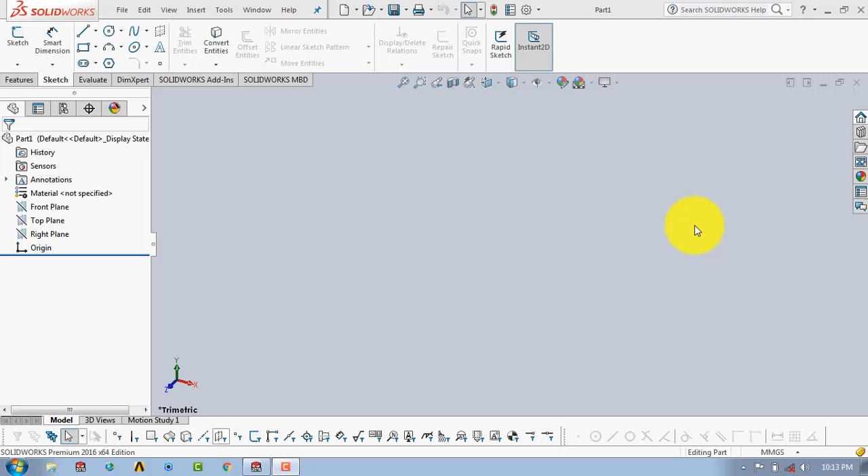Now for making a piston rod, first we will extrude a sketch. For that, go to the sketch, select the top plane. Now first we will do two concentric circles. So here is the first circle, second circle, and then we have to draw another section, another circle.

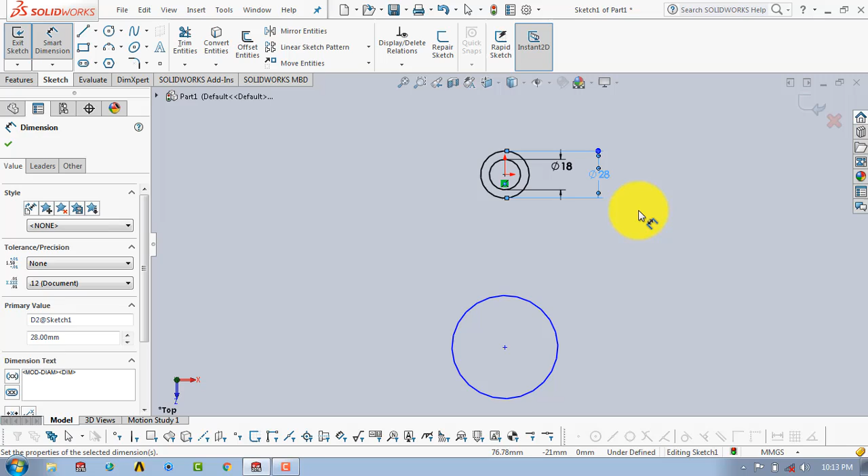Now after drawing this, we will give dimensions. Select the smart dimension. This circle has a diameter of 18 mm, this circle has a diameter of 28 mm, and this circle has a diameter of 50 mm.

After giving the diameters, we have to specify the distance between the centers of the circles. This distance is 125 mm. Then, OK. After that, we have to draw two vertical lines like this.

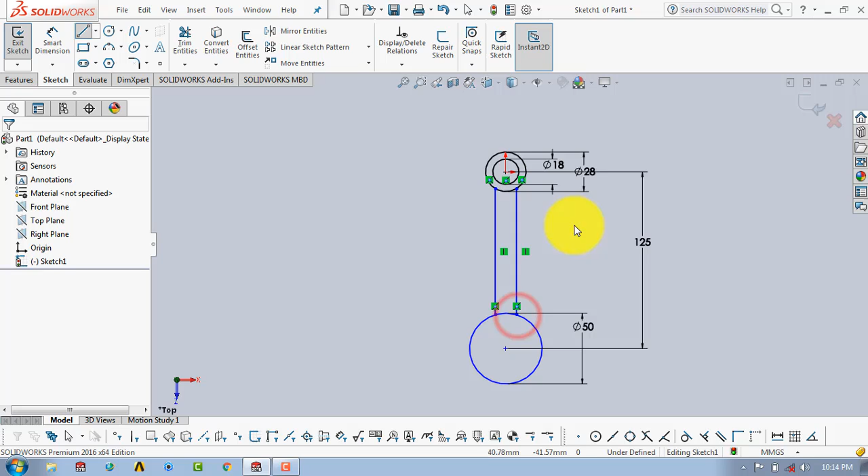Now we have to specify the distance between the two lines. Select the smart dimension, and here the distance between these two lines is 20 mm, and the distance of one line from the origin is 10 mm.

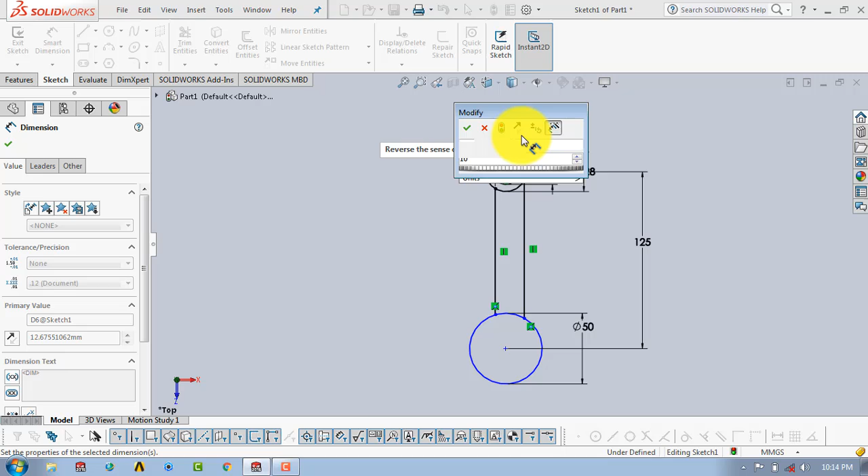Now after that we have to draw two circles. Here we will draw the first circle and here we will draw another second circle. After that we have to give the diameter to these circles.

So here it is having the diameter of 100 mm and it is also having the diameter of 100 mm.

Now we have to make this circle tangent to this line, but before that first we will draw two horizontal lines. Select the line and we have to draw two horizontal lines like this.

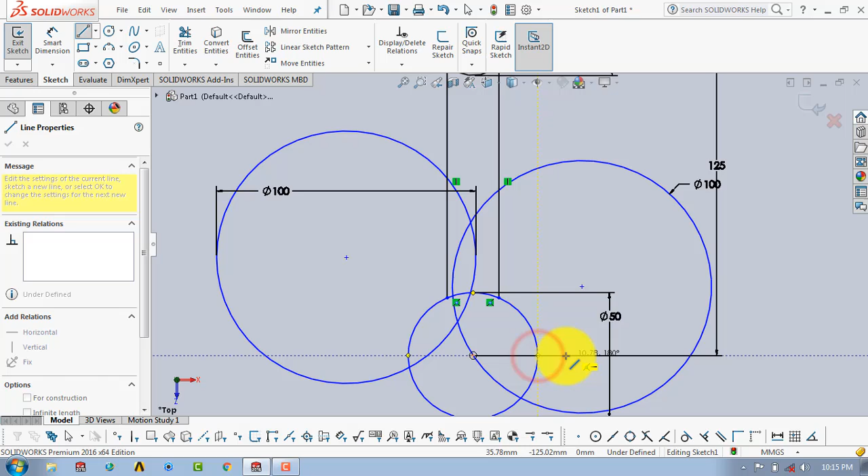After drawing two horizontal lines, we will go to the smart dimensions and give dimensions to these lines. So here it has a length of 13 mm and it also has a length of 13 mm.

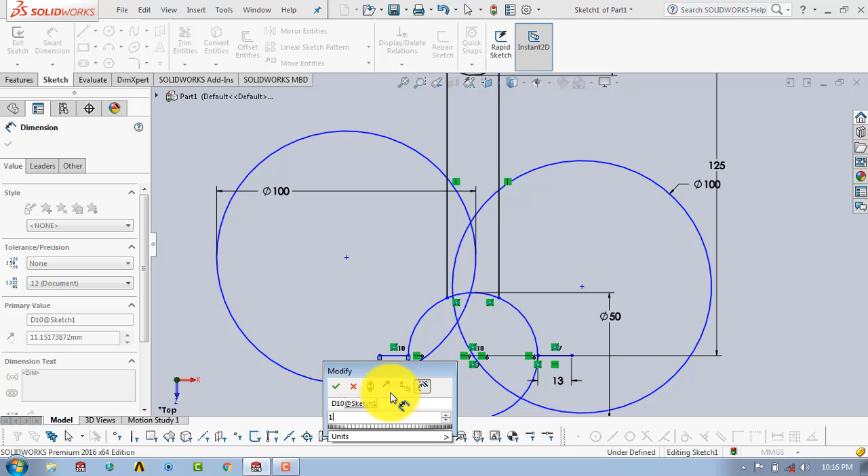After giving it length, we will draw two vertical lines like this, and they have a length of 25 mm. So here it is 25 mm and it is also 25 mm.

Now after that we have to make this circle coincide with this end point of the line. So we will select the circle, then select this end point, and select here coincident.

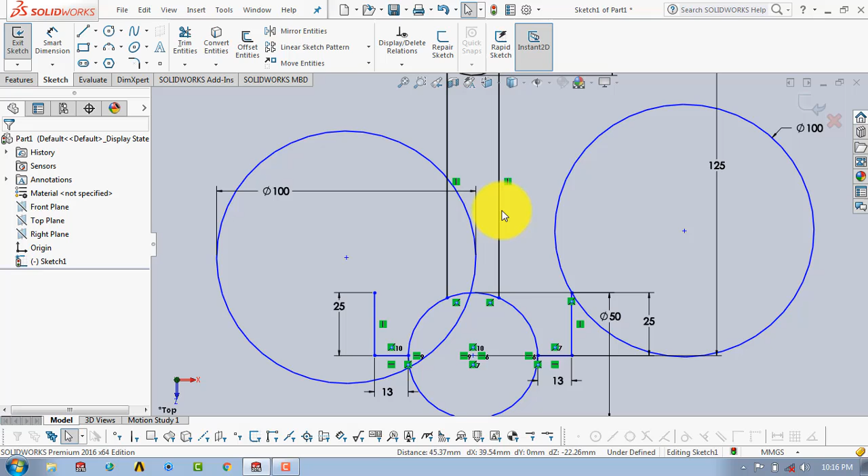OK. Now after giving coincident, we have to make this circle tangent to this line. So select the circle, select this line, and here select the tangent.

OK. Similar process we have to do with these circles. Select the circle, select the end point, and select here coincident. OK. Select circle, select the line, tangent, and OK.

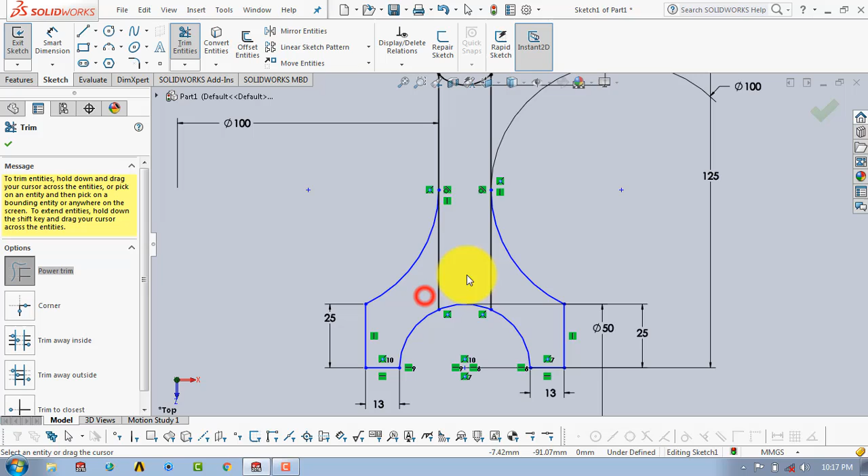After that we have to trim some unwanted portions. Select the trim entities, and now we will trim this circle and this circle. Also we have to trim these lines. After trimming this, we will click OK, and now a similar process we have to do over here.

For that we will draw two circles like this. Now select the circle and select this circle and give it tangent. OK. Select the circle, select the line, and then tangent.

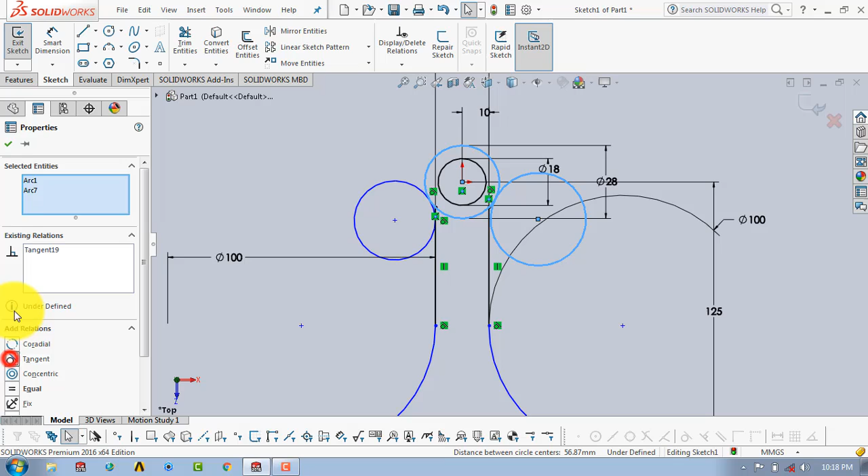OK. Similarly we have to do with this circle. So select the circle, this circle, and here tangent. OK. This circle, line, tangent, and OK.

Now we will give diameters to these both circles. Select the smart dimension, and here it has a diameter of 50 mm, and also it has a diameter of 50 mm. Then OK. Now we will trim the unwanted portion.

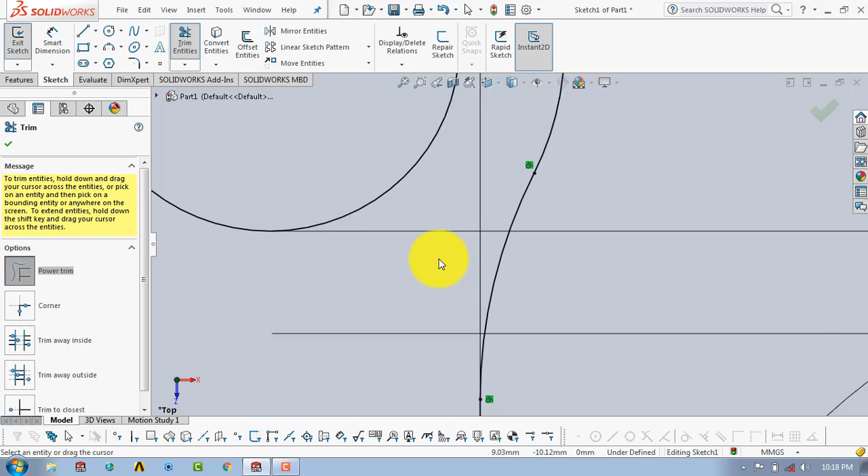For that select the trim entities, then select the circle, this, and also we have to trim this section, and also here, and then we will click OK.

Now our sketch is completed and now we will extrude this sketch. For that we will exit the sketch, then go to features, select the extruded boss feature.

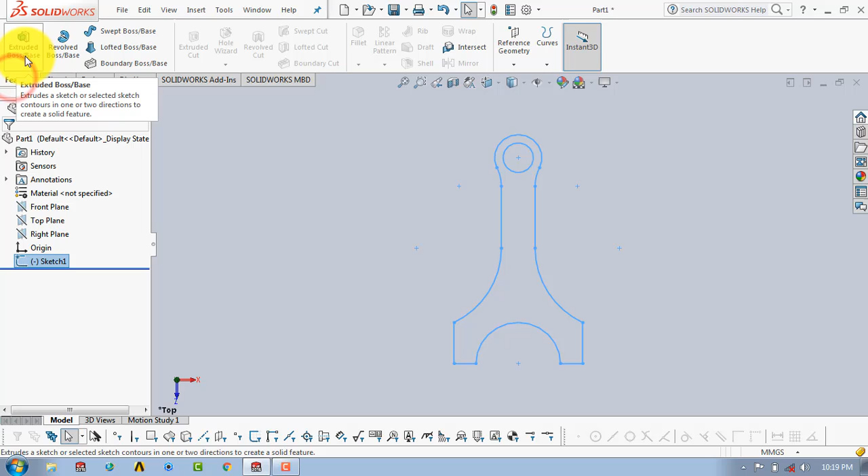Now here we have to extrude on both sides of the sketching plane. So select here mid plane, and the depth of extrusion is 15 mm. So enter 15 here and then OK.

After that we have to sketch on the upper surface. So select the sketch, then select this upper surface. Now we will draw one sketch.

For that here we will draw two concentric circles which have the same diameters as earlier, and after that we have to convert it into the entity, and also we have to draw another circle having a diameter of 60 mm.

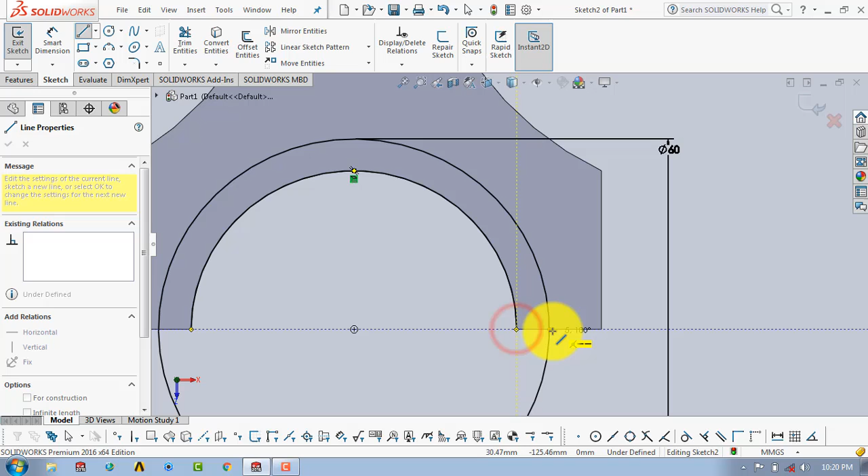So here it is 60 mm. Now we have to draw two horizontal lines from the end point of this semicircle which intersect the full circle, because we want to make a closed sketch. So here we have drawn two horizontal lines and then we will trim this semicircle. So here it is one closed sketch and it is another closed sketch. Then we will exit the sketch.

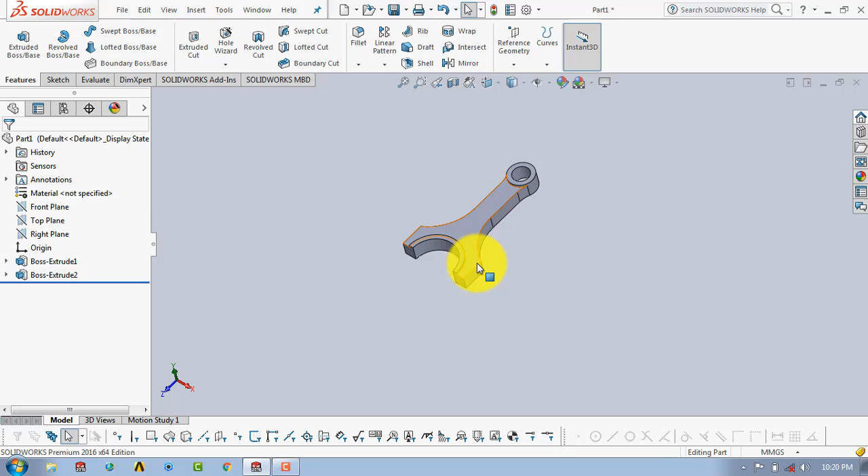Now go to the features and select the extruded boss feature. Now here the depth of extrusion is 2.5 mm and then OK. Now after making this we have to make the mirror of this second extrude. So here select that extrude, then select the mirror and select here the top plane and then click on OK. So here we have made the mirror of that.

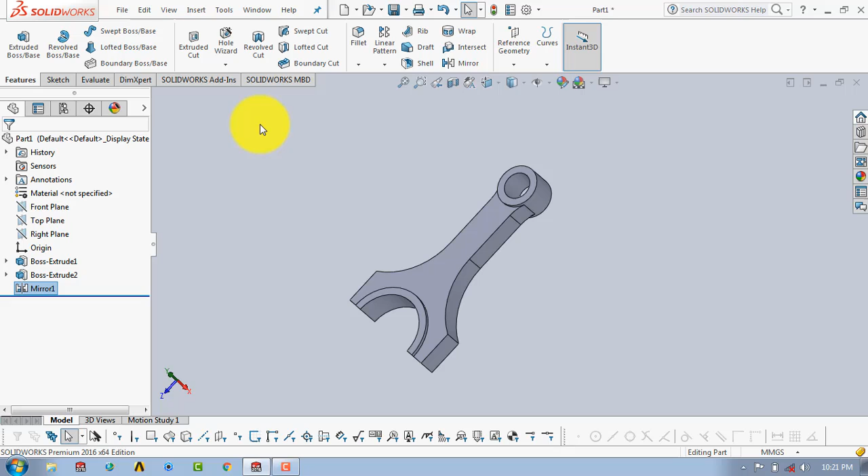Now after mirroring it we have to make the holes here, so that we can connect this part with the cap of the connecting rod. Now for that we have to use the revolve feature, and for that go to the sketch and select the top plane. Now we will draw a section. For that first we will insert a vertical center line. After inserting a vertical center line we will give it the distance from the edge, and here this distance is 6.5.

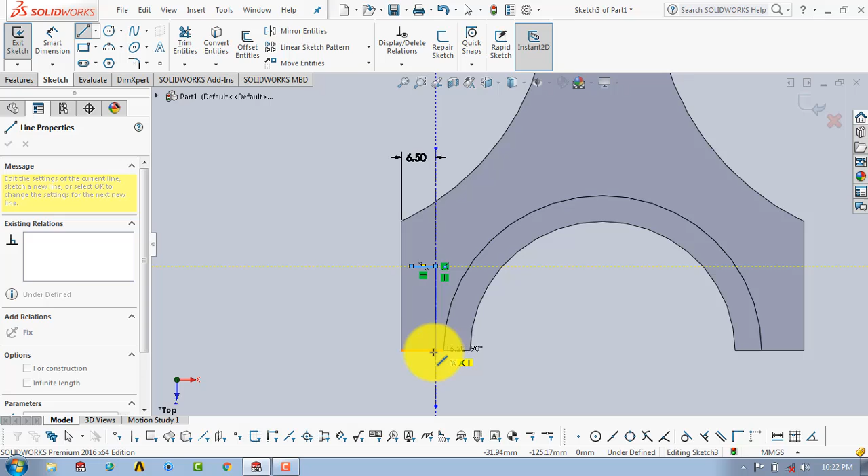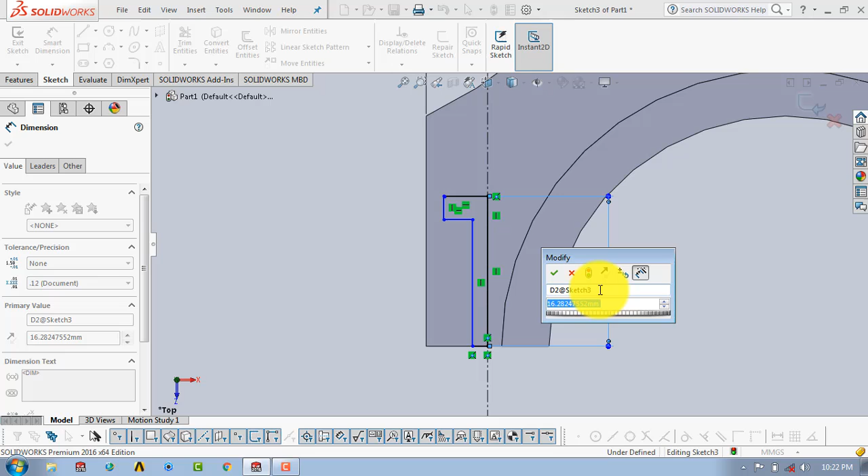Now we will draw the sketch. For that first we will draw the sketch with random dimensions. So here it is like this. After drawing the sketch we will give dimensions. So here go to the smart dimensions. Now here this length is 25 mm, or we can extend it up to this portion. So here we will give it randomly as 30 mm, so that it will go outside from this, or we can give it like 35. Now after that we have to give the dimensions to this horizontal line.

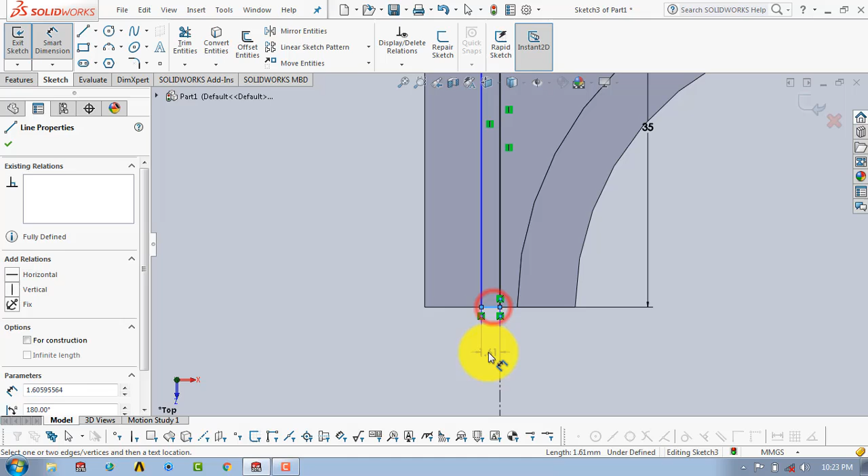Now this horizontal line is having the dimension of 2.75. Now we have to also give the dimension to this line, and this line has the dimension of 21.3. So here it is 21.3, and then here we have completed the dimensioning. So we will close the smart dimension, and also we will close the sketch.

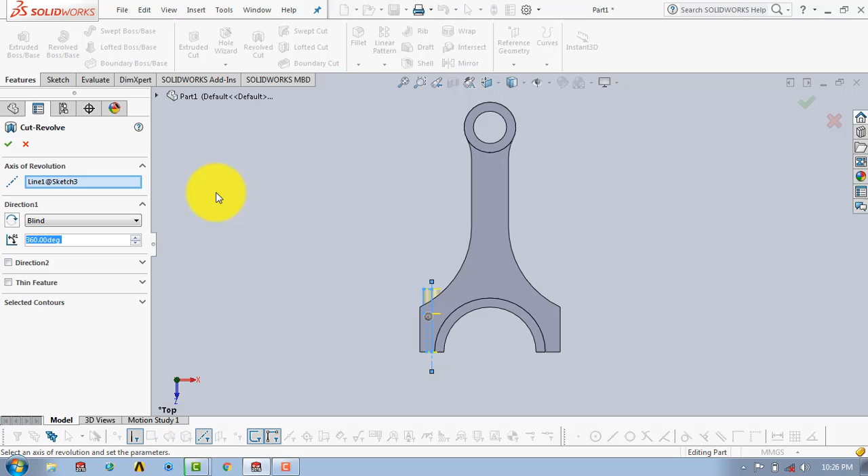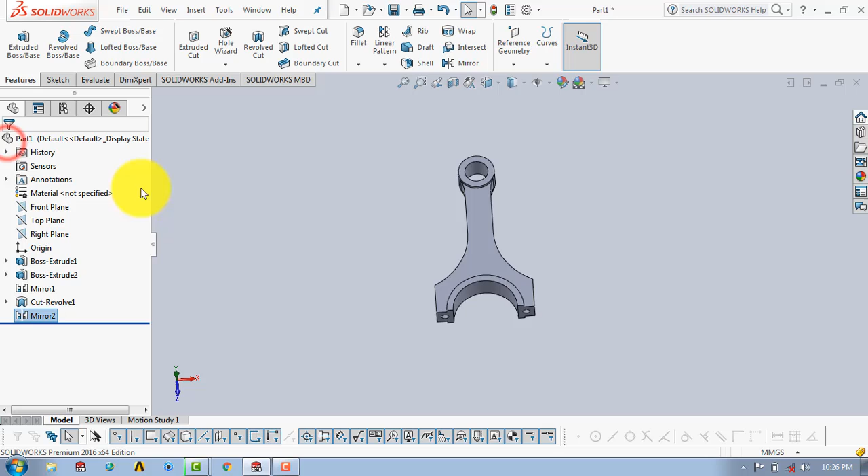So now we will select the sketch, then we will go to the revolve cut feature, and then click on OK. So here you can see that we have made the hole, and the same hole is to be made on another side. For that we will use the mirror feature. So select the cut revolve, then select the mirror, and here we have to select the right plane, and then OK. So now we have made the holes also.

After that we have to give the fillet radius. So select the fillet. Now here fillet radius is 10 mm, and then select this edge. Then we have to select this edge, and the same two edges we have to select on another side. So here we have to select these 4 edges like this, and then click on OK.

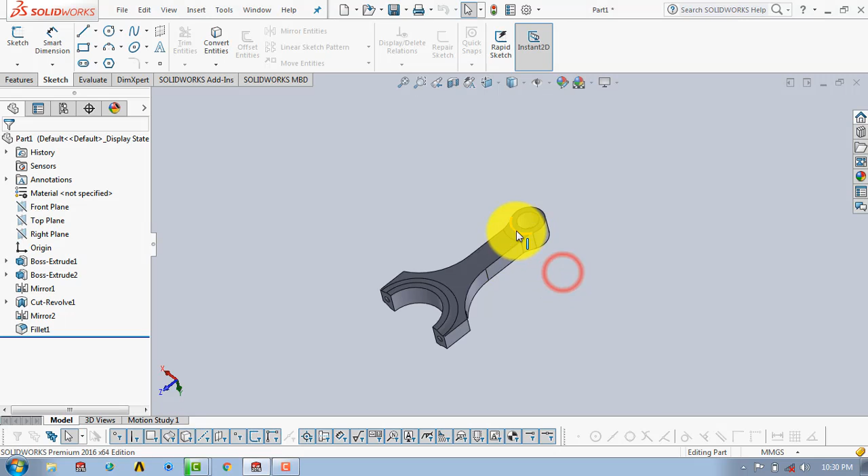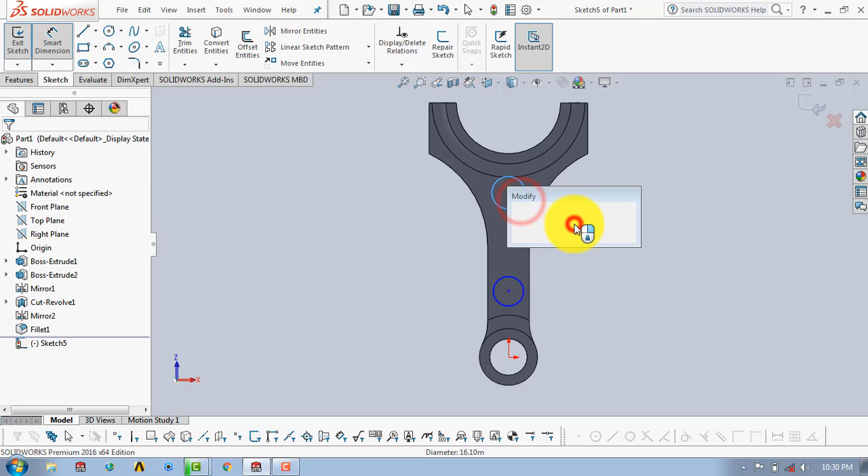After giving the fillet radius over these edges, we have to remove some material over here. For that, go to the sketch, then select this surface. Now we have to draw 2 circles like this. Then we will give dimensions. So here the circles have diameters of 10 mm, and now we have to give the distances. The distance between these two is 55 mm, and the distance between the centers of these 2 circles is 25 mm.

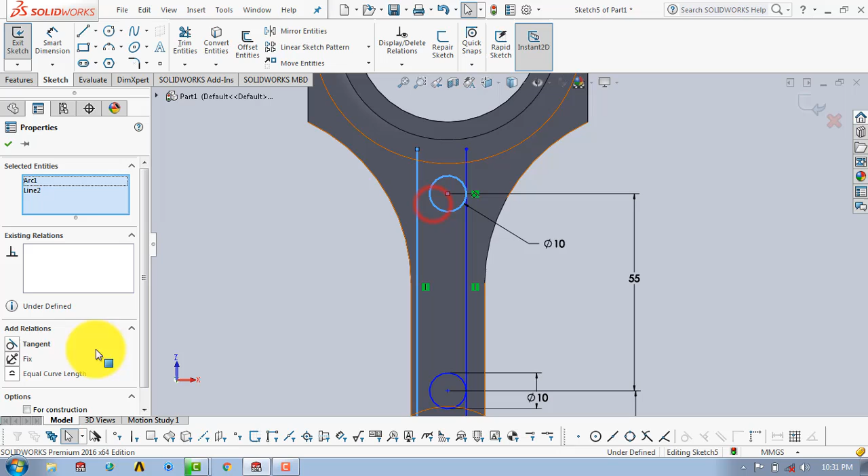Then OK. Now we have to draw 2 vertical lines like this. After drawing these 2 vertical lines, we have to give tangency to these circles. After giving tangency, we will remove unwanted portions. And then we will exit the sketch.

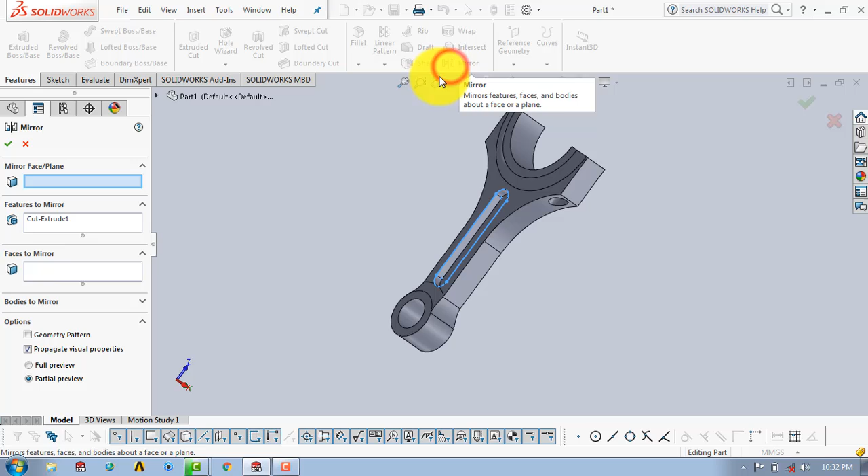After that, here we have to extrude cut this portion. For that, go to the features and select extruded cut, and here the depth of extrude cut is 5 mm, and then OK. We have to remove the same material on the other side. For that, we will use the mirror feature. So here go to the mirror, then select the top plane, and then OK.

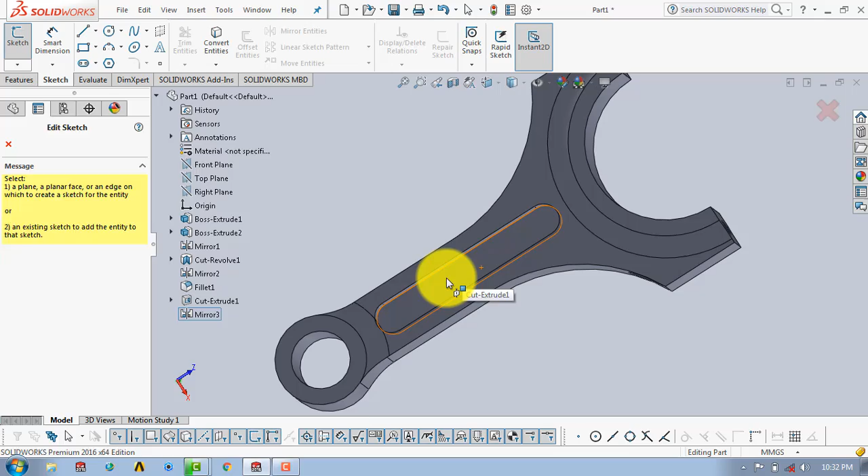After that, we have to make the name of the company as an impression over here, on this portion. For that, we have to go to the sketch, and here we have to select this surface. Now first we have to draw a vertical line like this, and we will give the distance of this vertical line from this edge, and the distance is 2 mm, and then exit the sketch.

Now we have to go to the sketch, then select that surface. Now we have to give the dimensioning. For that, go to the text, then here select this curve. Now here we have to type the text that we want to make the impression on the component. That may be the name of the company or the name or the model of the component. So here I will type it as Solidworks tutorials. Now here you can see that it is written here.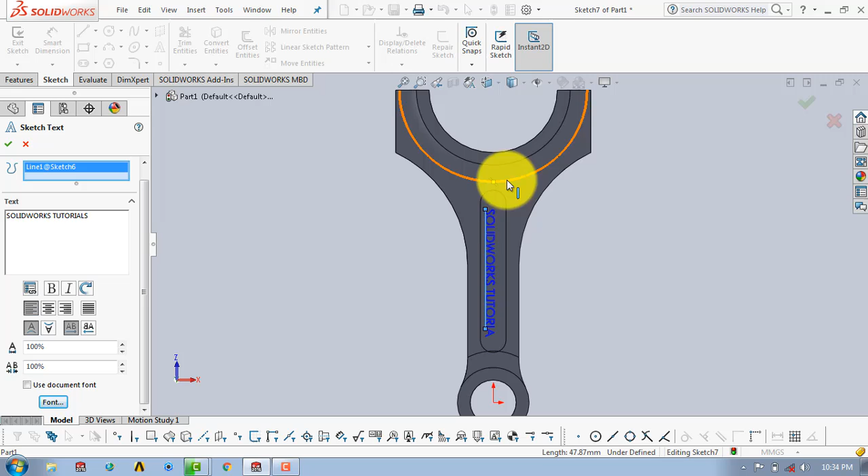After that, here we have to increase the size of the text. For that, we will uncheck this, go to the font. Now here we can increase the size. So here it is 3.175, so I will type here 3.5. So here I will give it 3.2. Then here we will select this text and select bold. Now click on OK. After that, we will exit the sketch.

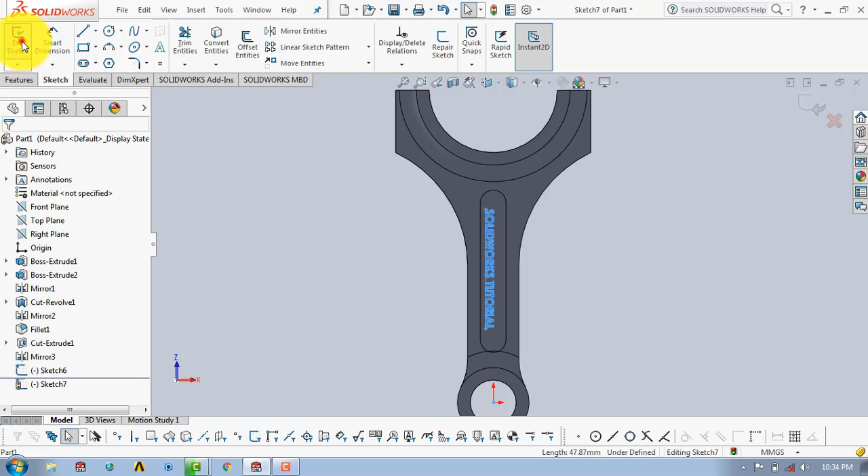Then we will go to the features and here select the extrude cut feature. Now here the depth of extrusion is very small, so here we can take it up to 0.5 mm and then click on OK. So here the name of the company, or whatever name we want to make an impression of, is made on the component.

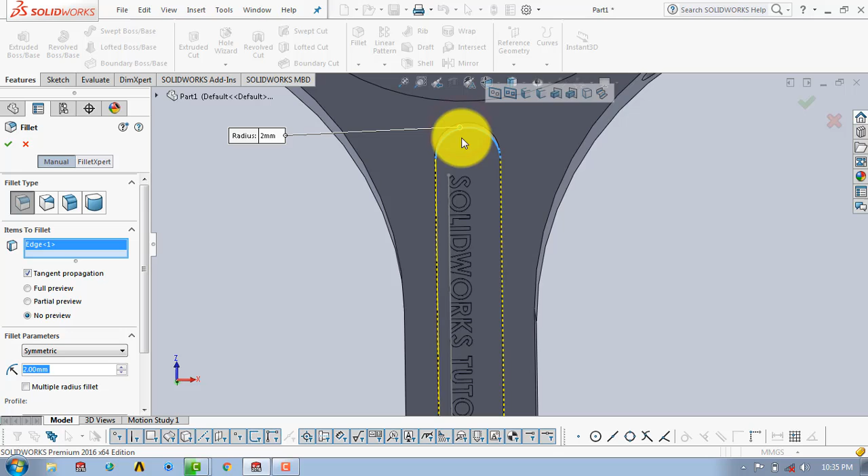Now after that, we have to give fillet over these edges. So select the fillet. Now here the radius of fillet is 2 mm, and then select these edges, and similarly on another side, select that edge, then OK. After giving fillet radius to these edges, we have to also give the fillet to these edges. For that, go to the fillet. Now here we have to give the radius of fillet as 5 mm. Then select this edge, this edge, this edge, and also this edge, and then click on OK.

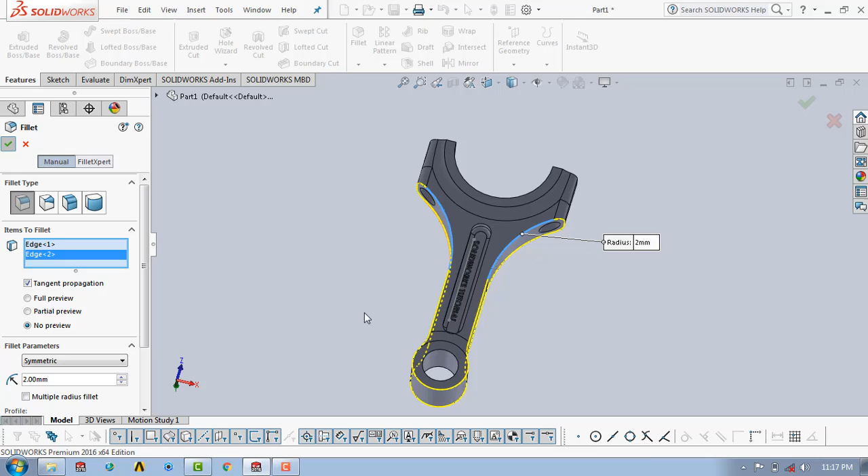After that, we have to also give the fillet to these edges. For that, go to the fillet. Now here the radius of fillet is 2 mm. Then select these edges and also this edge, and then click on OK. So here our first part is completed, and now we will save it.

So go to the file, click on save as. Now select desktop, and here we will create a new folder and we will name it connecting rod assembly. And here we will name it piston rod, and then click on save.

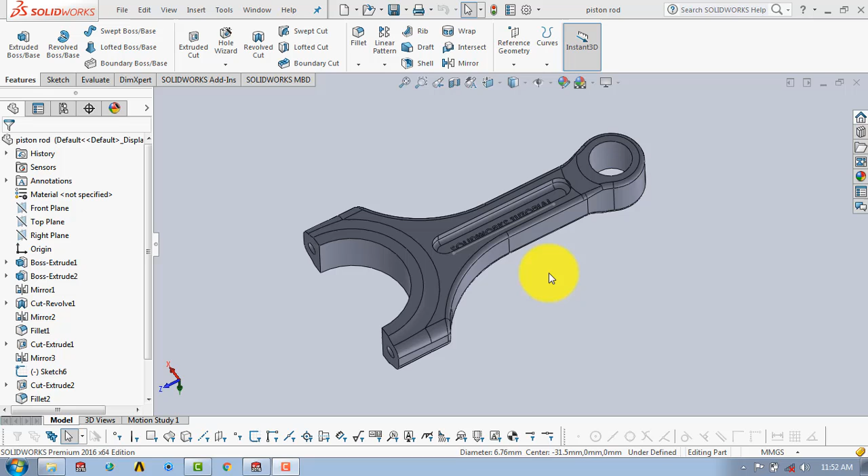Now we will move to the second part, which is the cap end of the connecting rod. For that, go to the new file, then part. Now go to the sketch, select the top plane. Now here first we will draw a circle having the diameter of 50 mm. After that, we have to draw two horizontal lines like this. Then we will give it length, so it is 13 mm and it is also 13 mm.

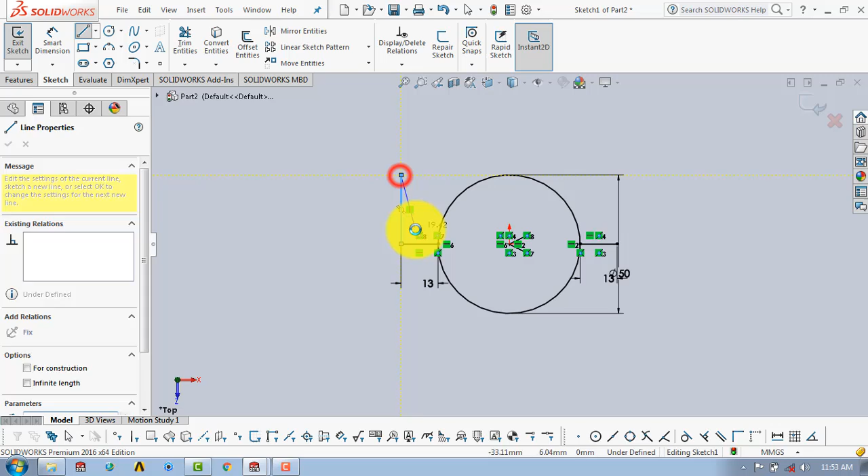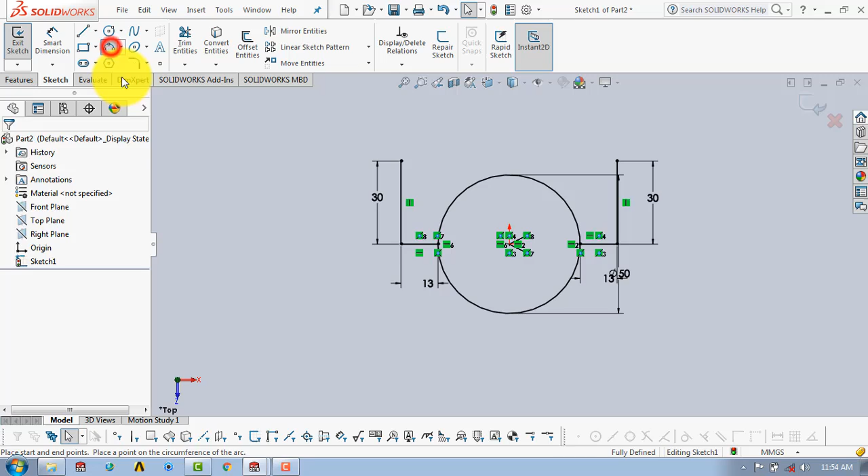After that, we have to draw two vertical lines like this. Now we will give it length, which is 30 mm. After that we have to make an arc. For that select the 3-point arc and draw one arc like this, and then we will give it radius, which is 90 mm. Now we will trim the unwanted portion, and here our sketch is completed, so we will exit the sketch.

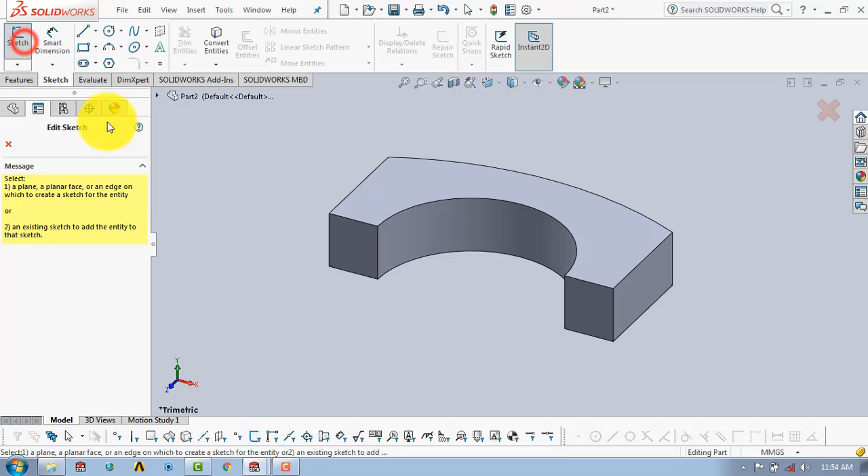Now go to the features and select the extruded boss feature. Here select the mid plane, and the depth of extrusion is 15 mm, and then OK. Now we have to make holes over here, and for that go to the sketch, select this face. Now here we will draw a circle like this. It has a diameter of 5.5 mm, and the distance of the center of the circle from this edge is 6.5. Now we will exit the sketch.

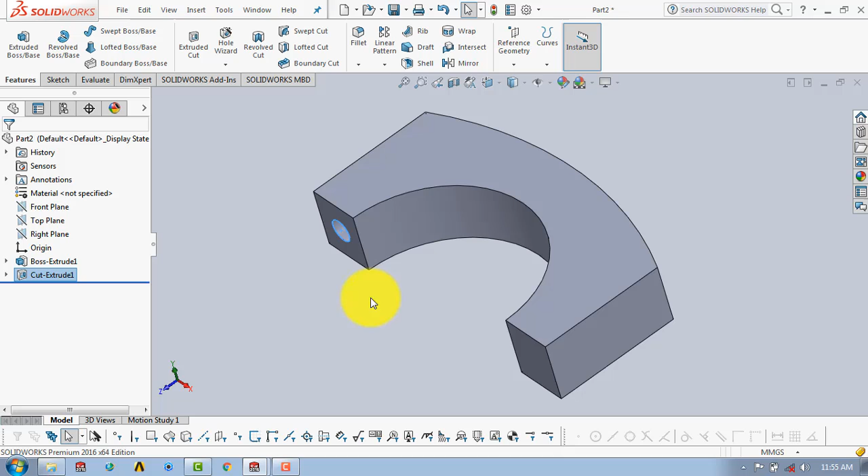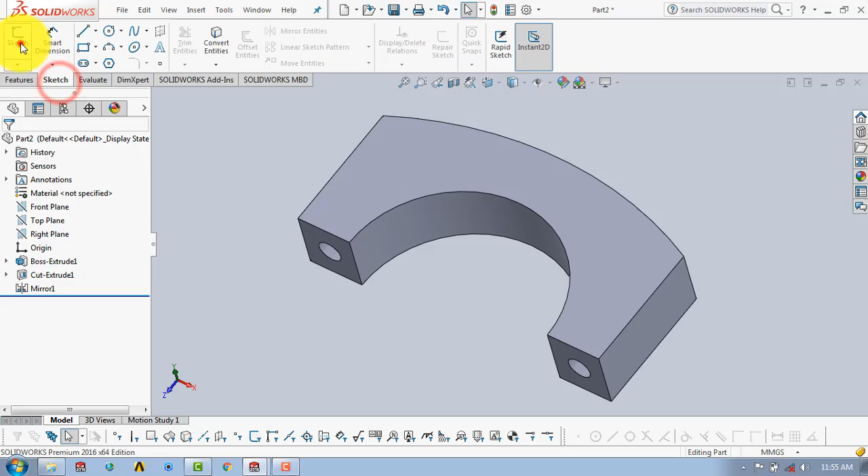Now go to the features and select the extruded cut feature, and here select through all and OK. Now the same hole we have to make on another side. For that select the extrude cut, go to the mirror and select the right plane, and then OK. After making the holes we have to make some extruded portion over this surface. For that go to the sketch, select this surface. Now we will convert it into the entity. Then we will draw a circle having the diameter of 60 mm.

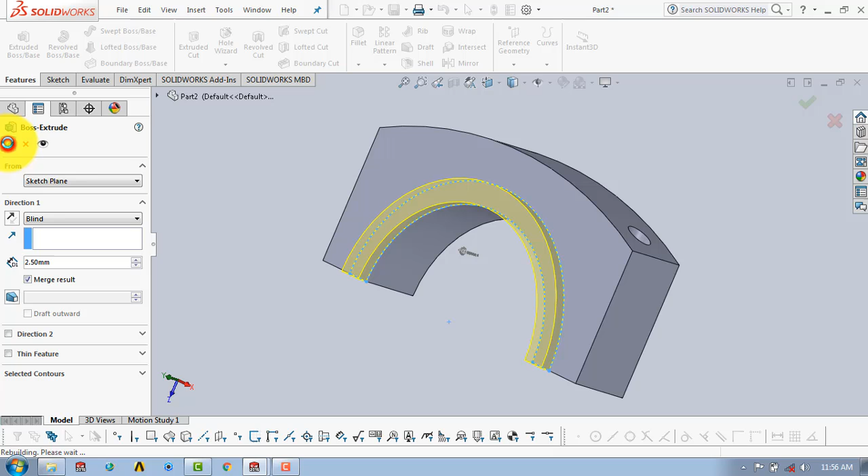After that we will draw two horizontal lines from the end point of the semicircle. Then we will trim the semicircle, and then we will exit the sketch. After that go to the features, select the extruded boss feature, and here the depth of extrusion is 2.5 mm, then OK. The same extrusion we have to make on the other side. For that select here mirror, and here select the top plane, and then OK.

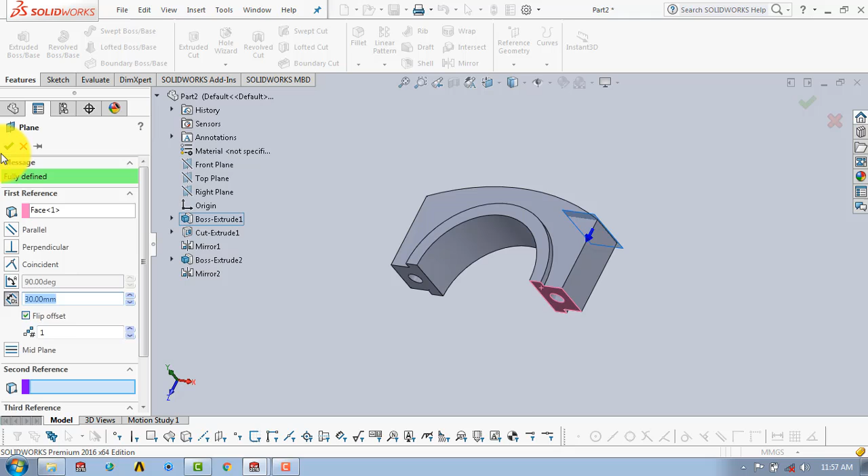After making this we have to make a plane. So here go to the reference geometry, select the plane. Now select this surface. Here click on the flip offset, and the distance of offset is 30 mm, and then OK. Now here go to the sketch, select the plane. Now here we will draw two rectangles like this.

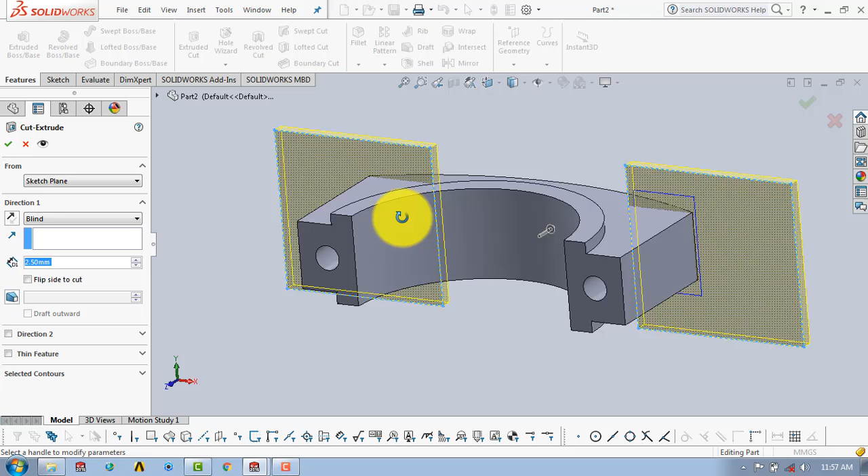After that we have to give the distance to the edge of the rectangle, which is 23 mm, and here it is also 23 mm. Now exit the sketch, then go to the features and select the extrude cut feature, and here select through all, and then OK. Now we will give fillet. For that select the fillet, then select this edge and this edge, and fillet radius is 5 mm, and then OK.

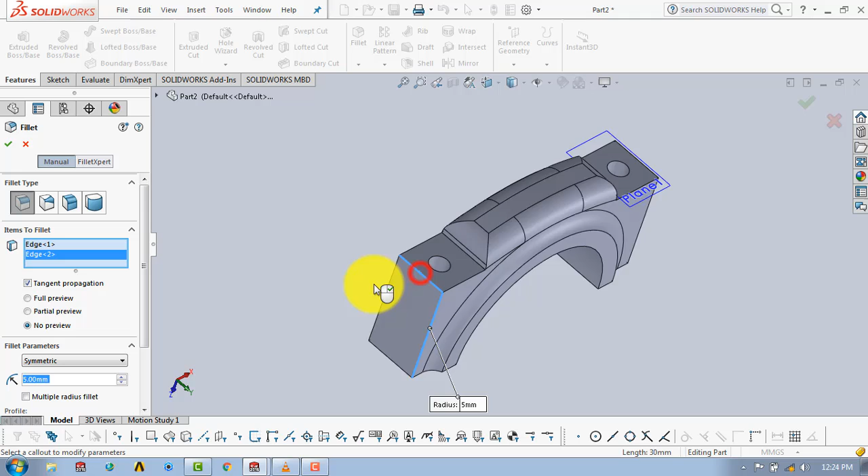After that we will give fillet over here also. So select this edge, this edge, this edge, and this edge, and fillet radius is 5 mm, then OK. After that select the fillet. Now we will select all these edges like this, and then OK. So here our second component is also ready. Then go to the file, save as, name it as cap end, and then save.

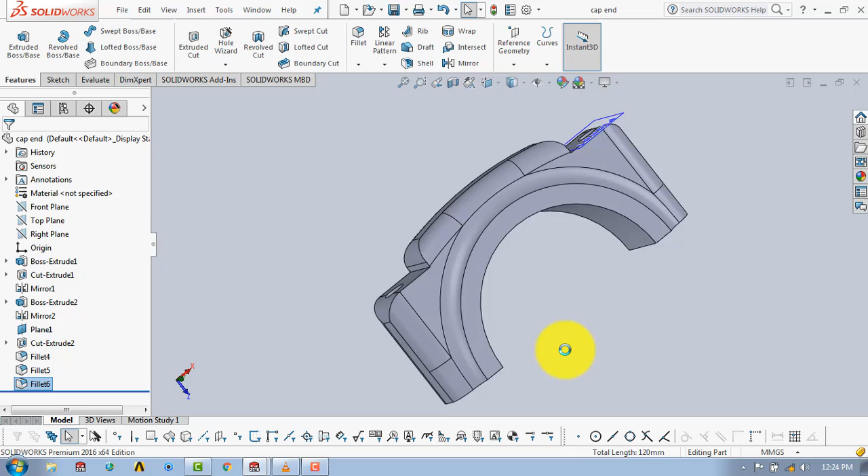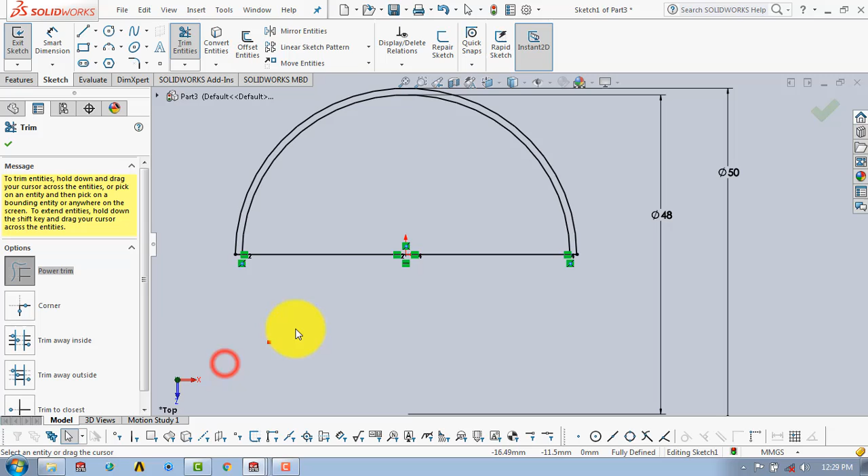Now we will make the third component, which is the bearing. For that, go to the sketch, select the top plane. Now here draw two concentric circles. Now it is having the diameter of 50 mm and it is having a diameter of 48 mm. After that, we have to draw one horizontal line like this. Then select the trim entities and trim these entities.

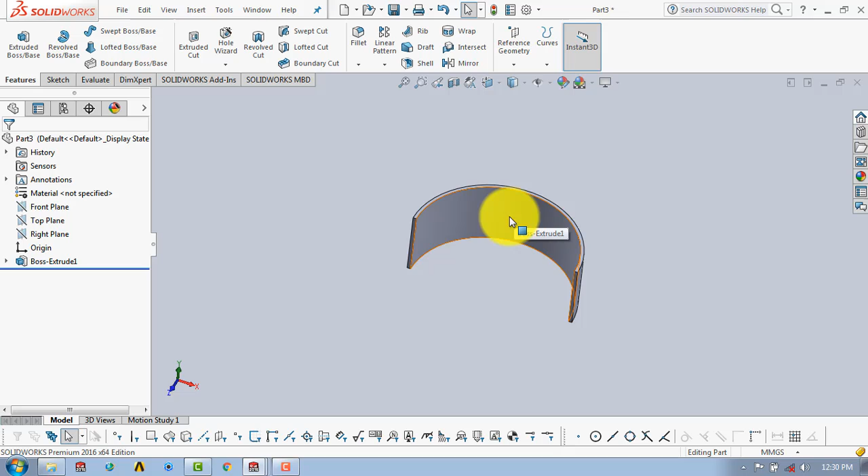Then exit the sketch. Now here go to the features and select the extruded boss feature. Select here mid plane and depth of extrusion is 20 mm, and then OK. Now we have to make one hole for circulation of the lubricants. For that, go to the sketch. Here select the front plane. Now we will draw one hole with the diameter of 2 mm. It is 2 mm. Then exit the sketch.

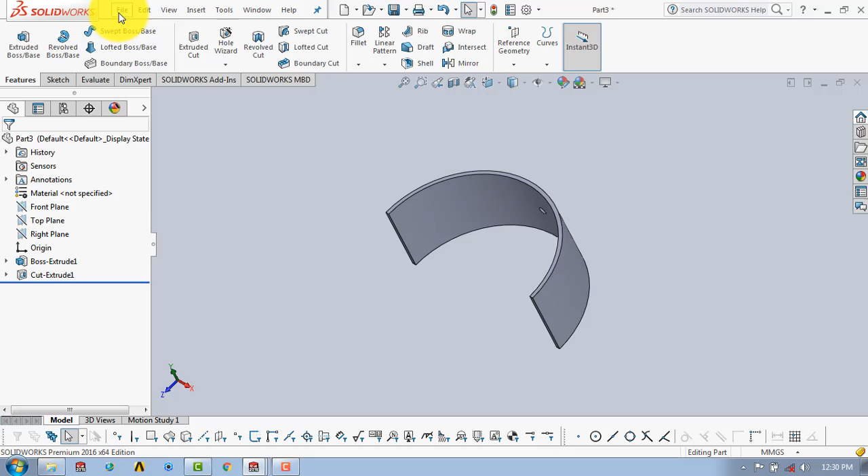Now go to the features, select the extruded cut feature and select here through all, and then OK. So here our third part is also completed. So here go to the file, save as, name it as bearing, and then save. Now we will make the fourth component, which is the bolt. Here the bolt is only for representation purposes, so we will not make threads on the bolt.

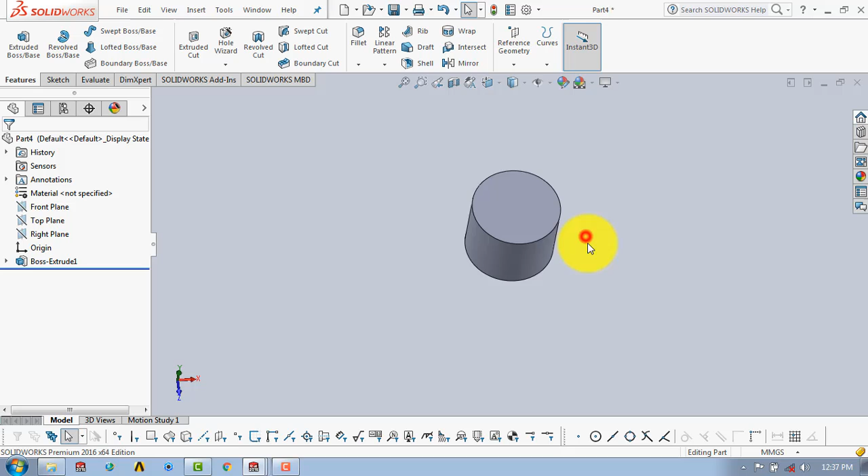Now for that, go to the sketch, select the top plane. Now here draw a circle and it is having the diameter of 10 mm. Then exit the sketch. Now we will extrude it. For that, go to the features, select the extruded boss feature and depth of extrusion is 8 mm, and then OK. Now we will make another circle. For that, go to the sketch, select this surface. Now here we will draw another circle with a diameter of 5.5 mm. So here it is 5.5 mm.

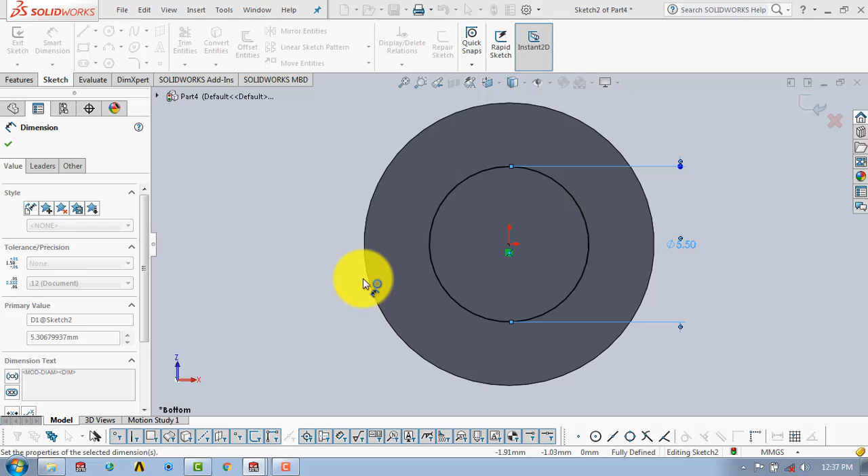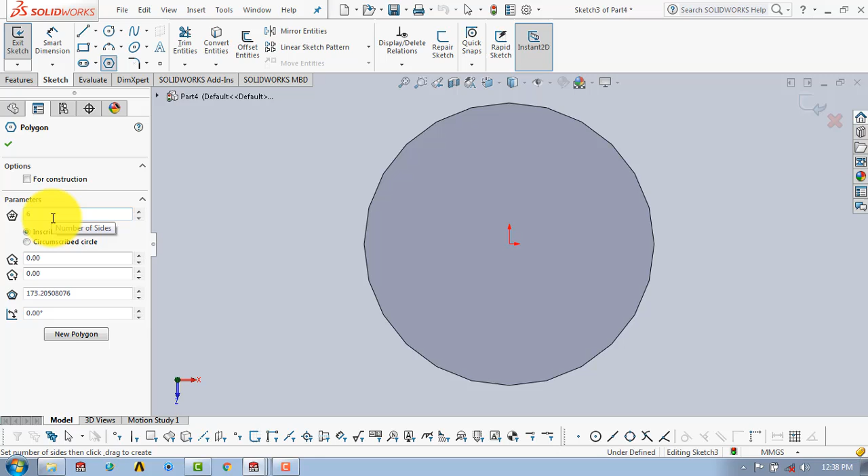Then exit the sketch. Now we will extrude it. Go to the features, select the extruded boss feature, and here depth of extrusion is 60 mm. So enter here 60, and then OK. Now here we will make an extrude cut, so that we can rotate this bolt with an Allen key. For that, go to the sketch, select the surface. Now here we have to draw a polygon having 6 sides. Draw a hexagon like this. Now we have to make this side vertical.

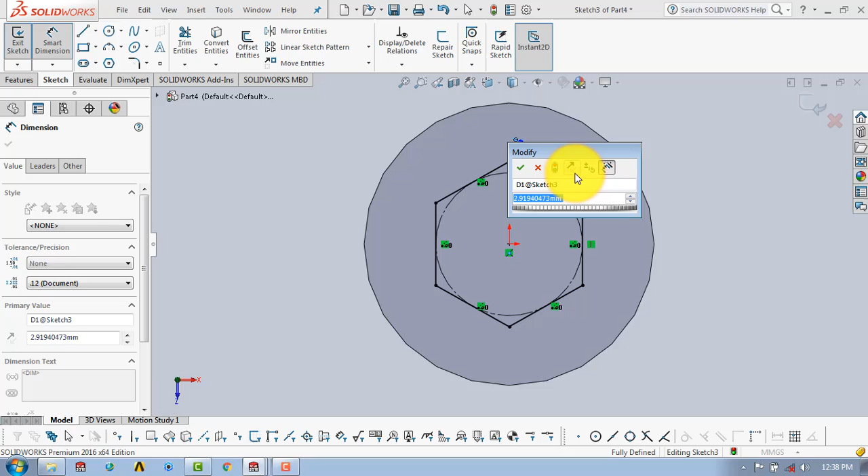After that, we will give dimensions. So here we will give length like this. So here length is 3.2 mm, and then OK, and exit the sketch. After giving the length, we have to extrude cut. So for that, go to the features, select the extruded cut feature, and here depth of extrusion is 5 mm, and

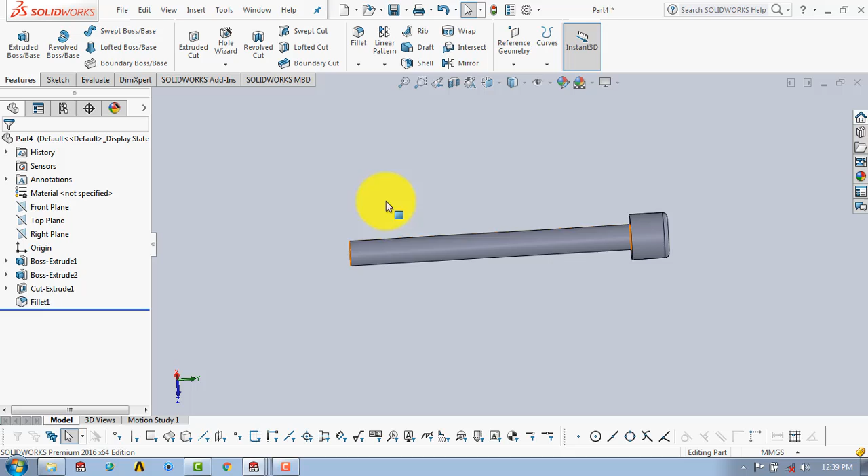then OK. After making this, we have to give fillet radius. So here select the fillet, and here fillet radius is 1 mm. Select this edge and then OK. Now we have to give the chamfer over this edge. For that, go to the chamfer, then select this edge, and here the distance of chamfer is 1 mm, and then OK. So here our fourth component, which is the bolt, is completed.

Go to the file, save as, and name it as bolt, and then save. Now we will make the last component, which is the nut. So here go to new, then go to the sketch, select top plane. Now here we will draw a circle having the diameter of 5.5 mm.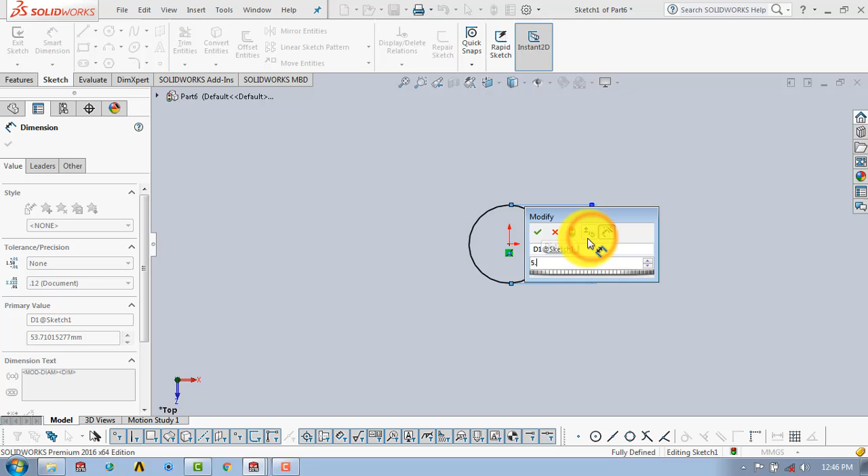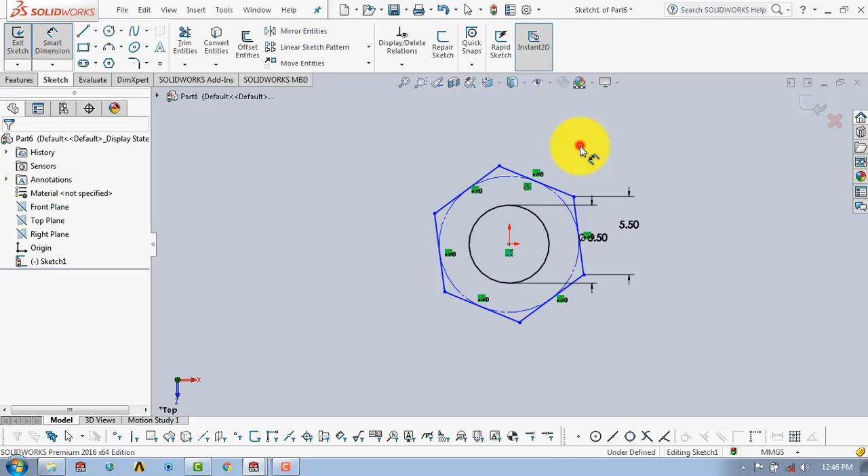After that we will draw a hexagon like this. Then we will give it the dimensions. So here it has a length of 5.5 mm. Now we will make this side vertical. So select the side and click on vertical. OK. Now we will exit the sketch. Then go to the features, select the extruded boss feature. Here depth of extrusion is 5 mm and then OK.

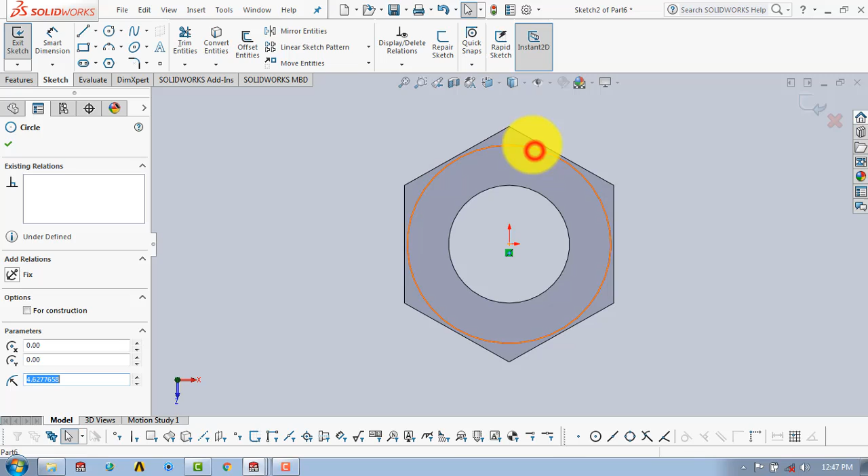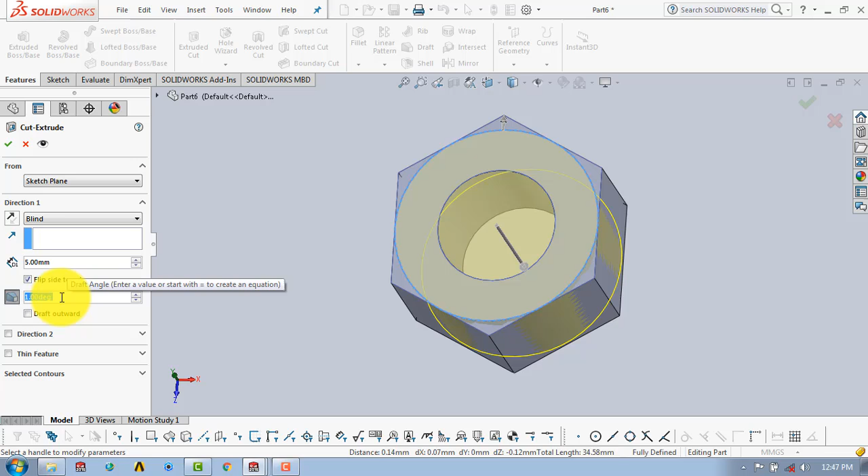After that go to the sketch, select the surface. Now we have to draw a circle. Then we have to make it tangent to the edges and then OK. Now exit the sketch. After that go to the features, select the extruded cut feature. Now here click on flip side to cut, and click on the draft, and here the draft angle is 45 degrees, and then click on OK.

Same thing we have to make on the other side, and for that we have to make one plane. So go to the reference geometry, select the plane, select this face, and OK. Now select Cut-Extrude1, select the mirror and select this plane, then OK. So our nut is completed and we will save it. Go to the file, save as, and name it as nut and then save.

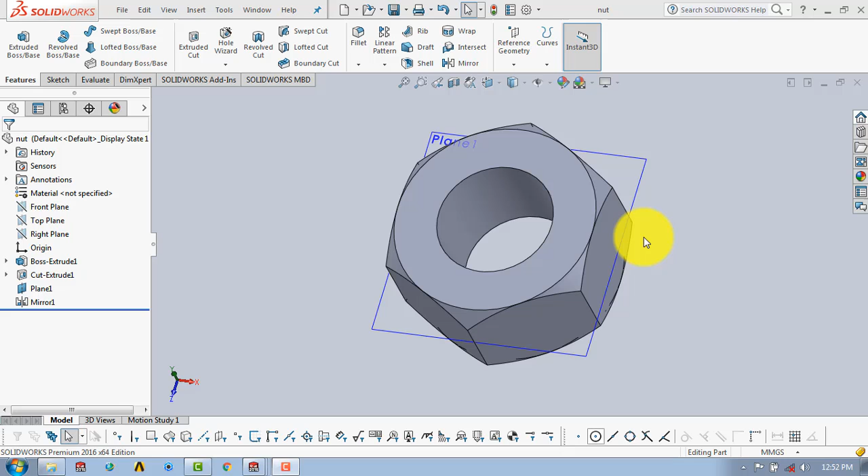Till now we have created all the parts, and now we are going to make an assembly of the connecting rod. For that go to the file and select assembly, then OK. So now first we will import the piston rod like this. After that click on insert component and select the cap end. Now click on mate, then select this face and this face to coincide, and here we have to reverse the direction. So click on flip mate and then OK.

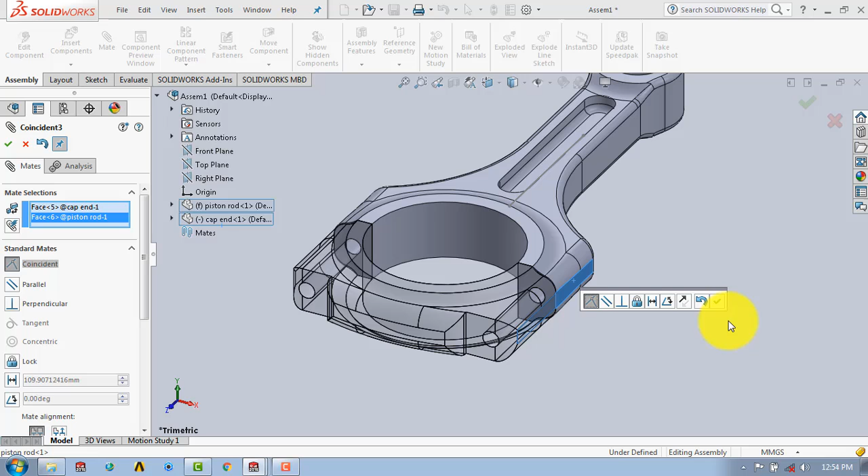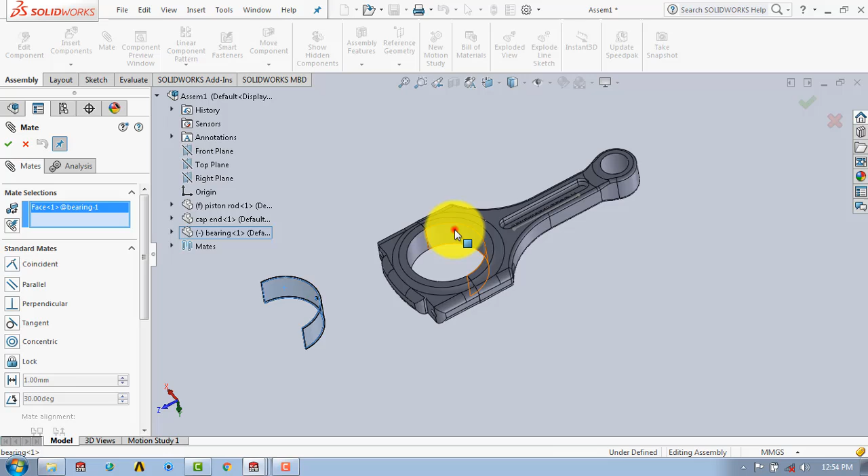After that we have to mate this face with this face, then OK, and lastly we have to mate this face with this face and then OK. Now we will insert the bearing, and for that click on OK. Now insert components, then bearing, then select this face, click on mate, select this face and this face, OK, and select this face and this face, OK.

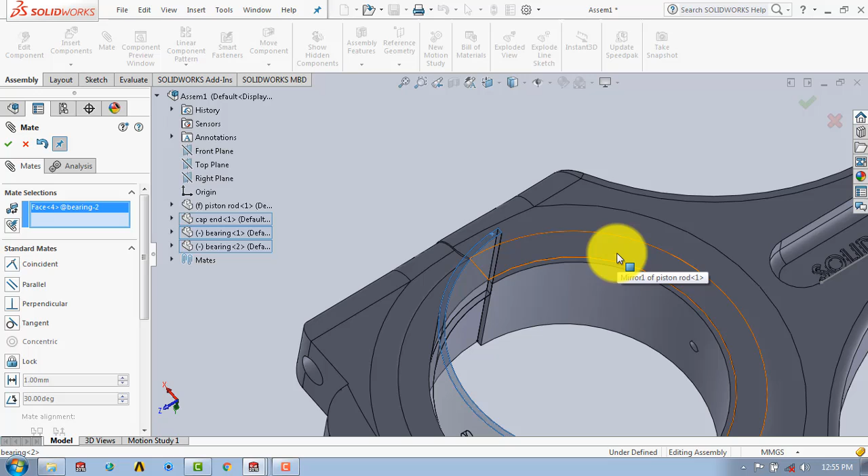Similarly we have to import the bearing for this side. So insert components, bearing, then mate, select this face and this face, OK. After that select this face and this face. Now select flip and OK. Then select this face and this face and OK. Now we will import the bolt, and for that insert components, bolt.

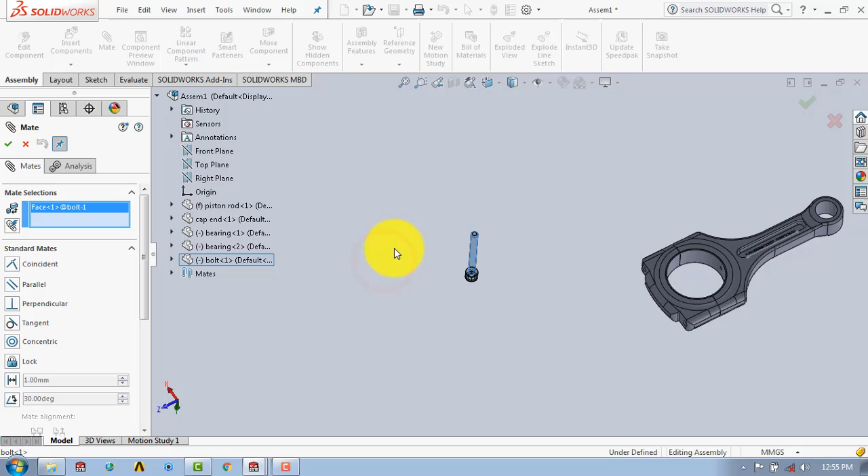Now click on mate, select this cylindrical portion, and select this cylindrical portion, and click on flip and OK. After that select this face and then select this face. Here click on flip, flip, and then OK. Now similarly we have to put the bolt on the other side.

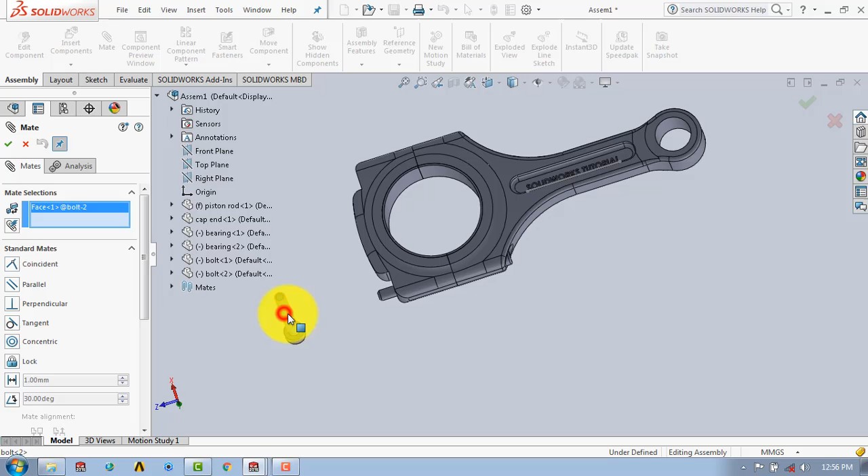For that insert components, bolt, mate, then select this cylindrical surface and select this surface. Now click on flip, OK. After that we have to select this lower surface, and this surface, OK. Now we will import the nut. For that insert components, nut.

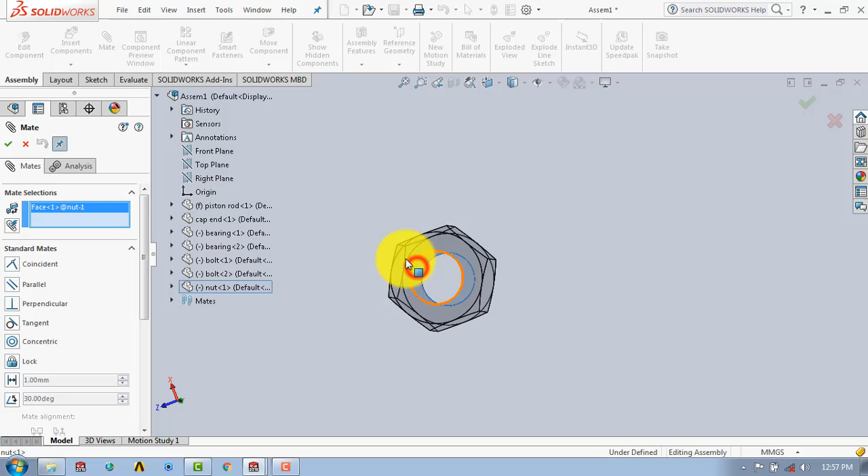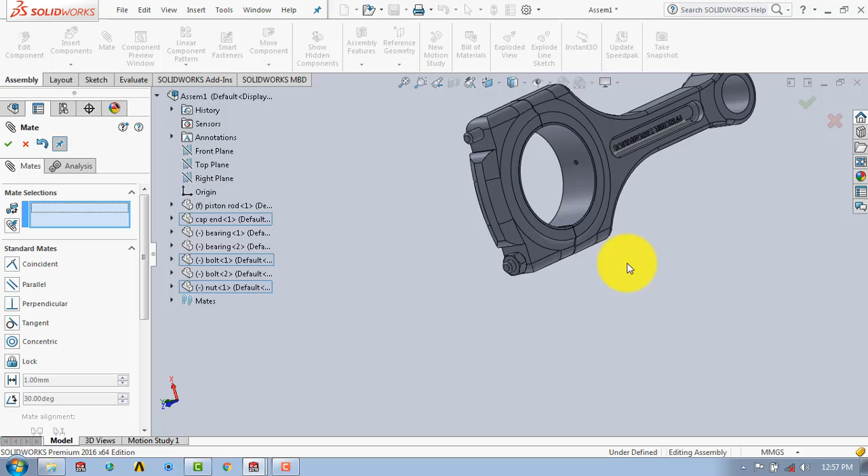Now select this inner surface, mate, and select this cylindrical surface, OK. And now we have to select this upper surface and select this surface, then OK. Similarly we have to use a nut for the other side. So insert component, nut, click on mate, then the cylindrical surface and this surface, OK. Select this surface and this surface and OK, and close the mate.

So in this tutorial we have made the complete assembly of the connecting rod.